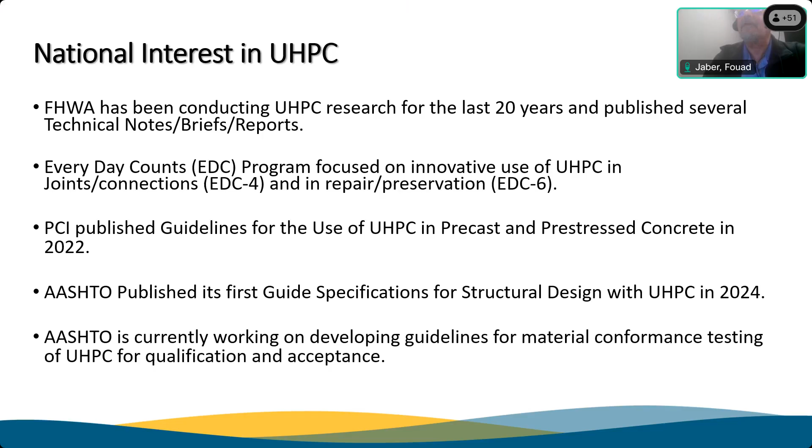So our vision, go ahead Lieska. So what we've done is we divided our vision, working with the University of Nebraska Partnership and FHWA, into two parts: seeing how we can use this innovative material in precast applications, which everybody knows we do in the yard with precasters.

So we developed our own Nebraska mix, using Nebraska aggregate material. Our vision is, we've now done the beams, we have a section with the decked I-beam using Nebraska mix, we're already doing that. We're working on the piles, we may have standardized using UHPC, and eventually we'll go to deck panels. That's really work in progress.

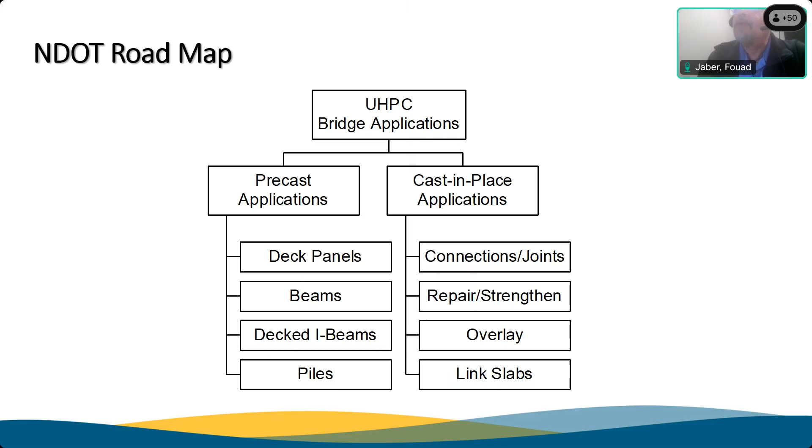The other side is establishing our own mix to use in the field with contractor mixing. This is for joint connections of bridges, repairs, and now underway we're going with overlays using overlay UHPC, and also the link slab, which can replace our deck expansion joints so they don't leak anymore over our girders. This material is very durable - chloride doesn't penetrate it. We think it's excellent material to restore our infrastructure in Nebraska.

We did participate in precast deck girder connection - we have that already, and now a decked I-beam already in the mix. We already let the project, to be constructed soon this year I believe. We sponsored research on how to do production of cast-in-place UHPC in bridge applications, and this is what we need to train our contractors on. This is work in progress.

We're working with our contractors, our district engineer, and our engineers to get this material in the field. Also, we have a repair strengthening material in place now. We're going to try to use it to repair ends of girders or any structural element that's deteriorated fast, and this is going to be good for the future.

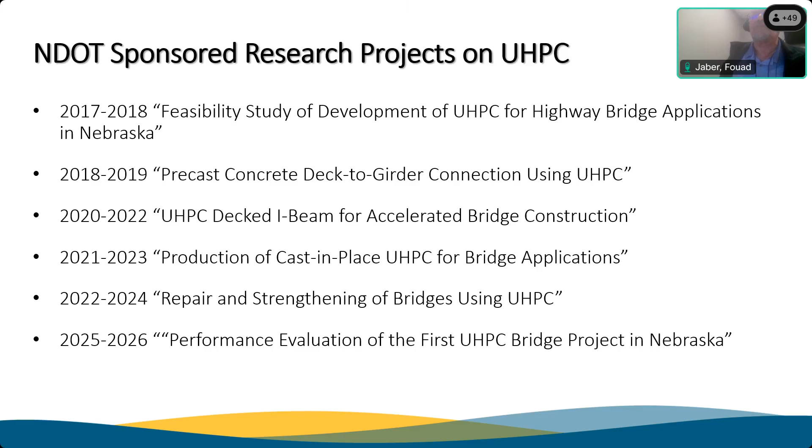And obviously we have the performance research sponsored now. After we get all this in place, we need to do the performance work - how we're going to collect data in the future to improve and improve and improve. So that's the research we've done so far, and more to come, I hope. Implementation-wise, implementation is very hard - it's always good to have research, but when we come to implementation, that's really the elephant in the room.

But regardless, we try to get our hands full. We did UHPC in the connection in the Primrose project in 2014, and that was successful. We partnered with FHWA on that, EDC count, everyday count. We did the transverse joint under an ABC project, finishing the project in 30 days using UHPC, built in Laurel in 2018.

So far, we have in the book with the precaster, actually from South Dakota, Gage Brothers, using UHPC decked I-beam. This is hopefully going to be our standard section, if successful, or we can improve on it later to see how it goes. But anyway, this project is running right now - we're going to build it this year. We'll see how it goes.

And obviously, we now have a repair project underway to use UHPC in deteriorated pier columns and girders. This project is already in the books - we're working on it to see how it's going to perform, and we're going to teach the contractor in the field how to mix it and perform all this mixing procedure, with the help of University of Nebraska.

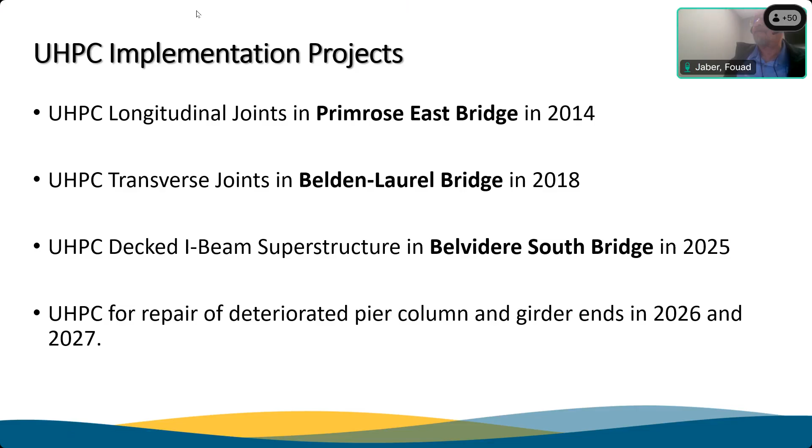So in general, I've given you a little taste of what we've been doing. We are excited about this innovative material coming to Nebraska. I think we are going slowly but surely, and I think this material is going to be here for hundreds of years. Thank you very much for your attention.

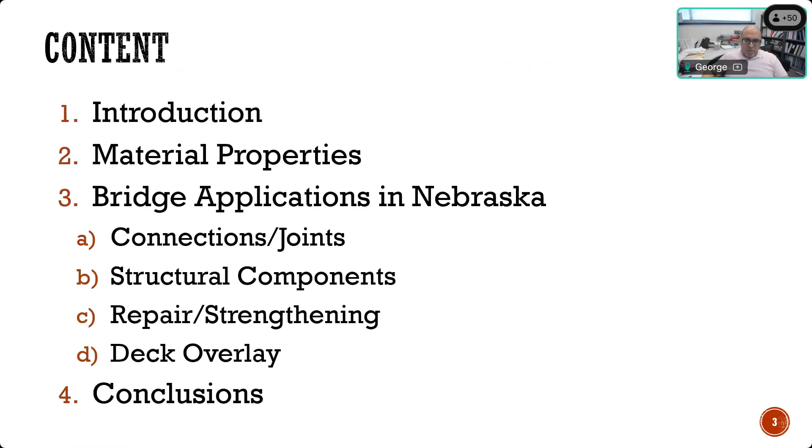I will first introduce what UHPC is, how it's defined, how it's different from conventional concrete, and then go more in depth into the properties of this material, because the difference in properties will also make the design and construction done differently. Then I'll go over the applications, including those Fuad mentioned, and show the research work done at the University of Nebraska, sponsored by the DOT, to make sure we are using it the right way and getting exactly what we are looking for. I'll group them into connection joints, structural components, repair and strengthening, and overlay, and conclude with a summary of what was done.

If we look at the definitions of UHPC, the Federal Highway Administration defined it as you can see on the screen. It is a cementitious material with the same ingredients as conventional concrete, but the gradation of the particles is different, optimized to minimize the pore structure. By doing that, you get a material with very low permeability, or very high resistance to penetration of liquids or contaminants. That's what gives it that durability aspect, which is the most important one.

In addition, it has a high percentage of discontinuous internal fiber reinforcement. As you can see in this picture, a specimen is being pulled in tension, and you can see these fibers sticking out of the concrete, bridging the gap between the two parts until failure. In the cross section, all these little dots are the fibers. This high percentage of fibers provides tensile capacity of the concrete even after cracking, so the concrete doesn't just lose capacity once it cracks but can sustain it. That's why it's called sustained post-cracking tensile strength, at a minimum of 750 psi, though most of the time we get higher, 1,000, 1,200, or even sometimes 1,500.

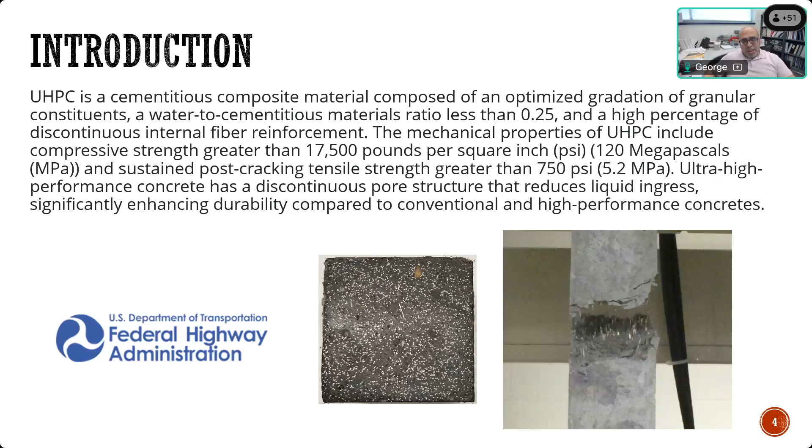This is the definition by the FHWA, but before that, there was the first ASTM standard done in 2017, ASTM C1856. Up until now, that's the only ASTM standard for UHPC describing how to fabricate a specimen and test it to make sure the properties are met. They also add to the definition that the nominal maximum aggregate size is less than 5 millimeters or a quarter inch, so UHPC doesn't have any coarse aggregate, only sand and powder material.

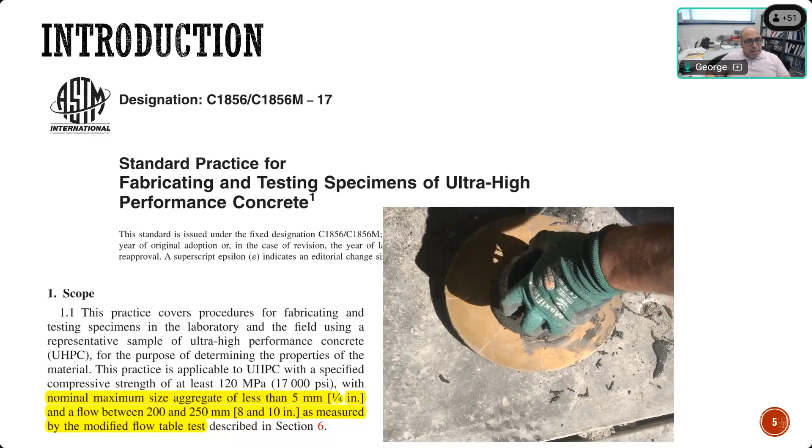It also adds a statement not in the FHWA definition, which is having a flow of 8 to 10 inches measured using the flow table test shown on the screen. So it's a very flowable material, like self-consolidated concrete, and you don't need to vibrate it. This gives the material the ability to flow and fill very tight spaces between reinforcement or strand, or allow for very small cover, because it's highly durable and at the same time very flowable.

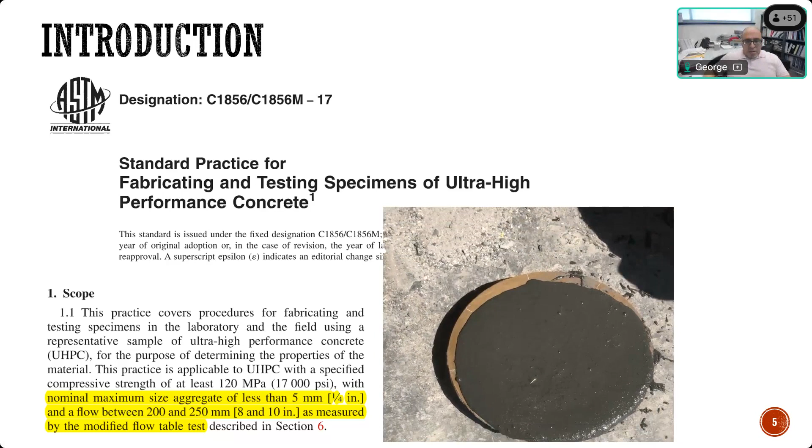As mentioned earlier, the PCI completed a 3-year research project from 2019 to 2022, publishing a long report showing different types of applications for UHPC, not only in bridges but in bridges and buildings. They also published a report giving guidelines for precasters on how to produce UHPC and how to do quality control. More recently, a year ago, FHWA and AASHTO published the first document on guide specifications for structural design using UHPC. It doesn't cover everything like regular AASHTO LRFD, but it covers enough for the DOT to start making components using UHPC.

As you can see from the picture, even on this cover, you see how thin the web is. This web is with UHPC, you don't need to add reinforcement. You don't even need to add reinforcement in the bottom flange or top flange because of the fibers within this material that give it some kind of reinforcement. So it can basically reduce significantly the amount of conventional reinforcement in concrete.

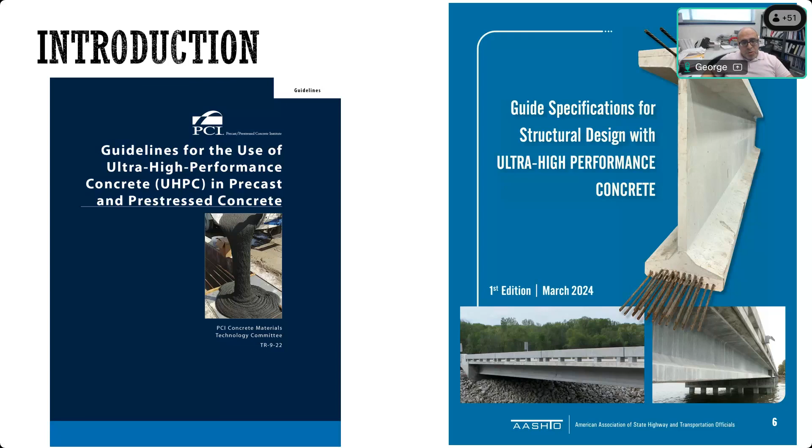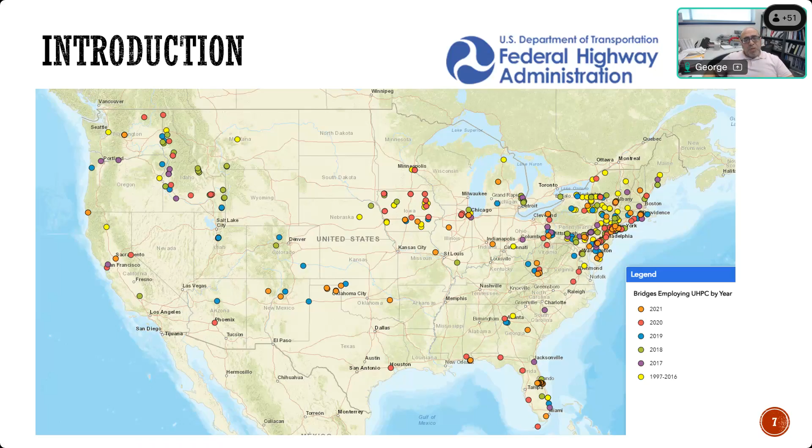Just to give you an idea about how widespread the use of UHPC is, this is a map from the FHWA website that shows the different projects and their distribution across North America. It shows how the projects increased recently, specifically in the last 3-4 years, with a large number of projects in the East Coast, especially in New York and New Jersey, and some in the Midwest in Iowa and also Nebraska.

If we look at how these projects are distributed with respect to the type of project, you'll still find that the number one application of UHPC, representing 77%, is the connection between the joints of precast pieces. So that's the most common application. And then after that is the use of link slabs to replace deteriorated expansion joints.

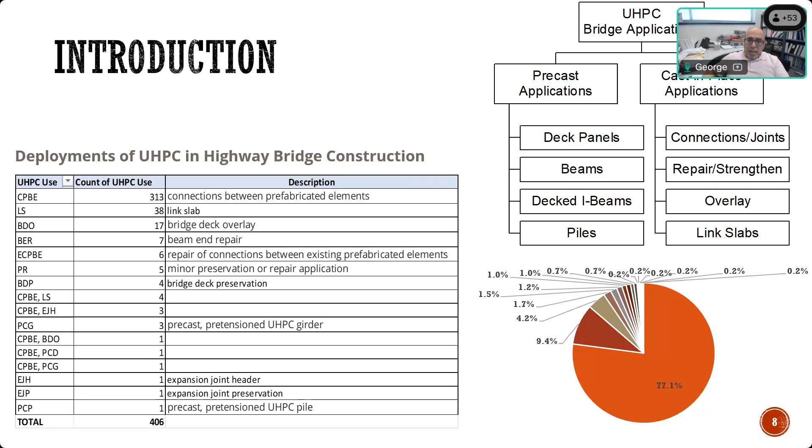So to present a little bit more information about what are the constituents or ingredients of UHPC, this is a mix that was developed 6 years ago using local material in Nebraska, and that's the composition, and that's kind of a schematic presentation showing the particle sizes.

The largest particle size is actually the fine aggregate. So you have a fine aggregate, number 10 sand, that's the majority of the mix. After that comes the cementitious material, which is cement, and it has slag and silica fume as supplementary cementitious materials. In addition to that, you have water and admixtures, and the amount of water is very small compared to the amount of cementitious material. The ratio is less than 0.2, which is a very low water cement ratio.

However, with the use of high range water reducers and workability retaining admixtures, this allows the material to be very flowable and maintain its flow for a significant amount of time. And of course, the most important component for the tensile behavior of UHPC is the fibers. I show a picture here to give you a sense of how big these fibers are: 1/2 inch long and a very, very small diameter, 0.02 inches.

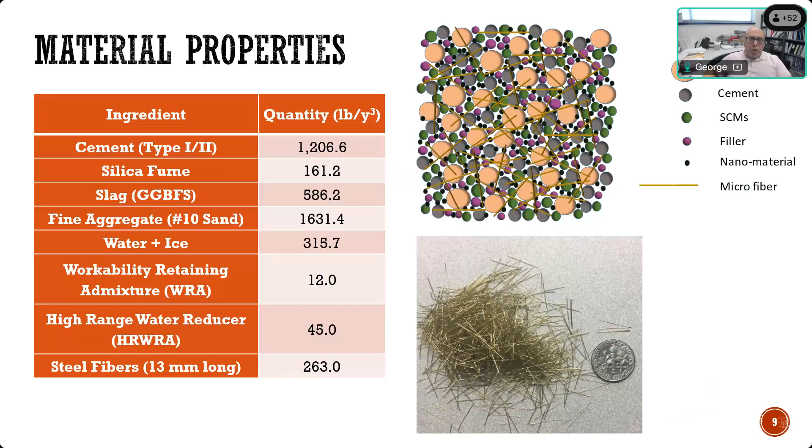Here's just showing you some of the properties that you get from this mix. This is results from a mix that was done actually not in the lab as a small batch, but at one of the precast producers in Nebraska. When we did one of the specimens, they made a large quantity, about 6 cubic yards of UHPC, and we did the testing for them back in '22.

You can see the compressive strength grow significantly, and even after 51 days, it's still going up, and we reach over 21,000 psi compressive strength, much higher than what you usually get from conventional concrete.

It is actually showing you the failure of the specimen even under that high load. It does not have the same conventional failure that you get when you test a cylinder. You don't form a cone or big cracks, or get it completely fragmented, but you basically just get cracks with the fibers holding it together. You can see also the fiber distribution across the section. That's what gives it the ductility that you need and prevents it from having a sudden failure.

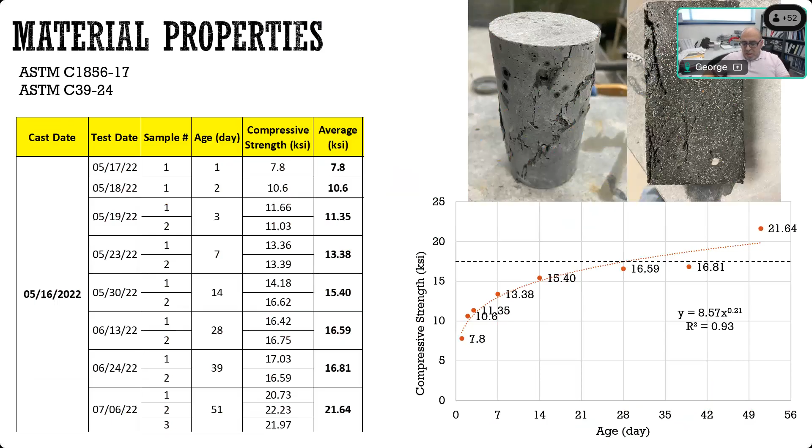Another test that is very important for UHPC is the flexural test, which is pretty much a 4-point bending or third point loading test, where you have a prism made of UHPC loaded at 2 points in the middle. This is a 12-inch span, 14-inch prism, with either a 3x3 or 4x4 cross section. There are two types of prisms, and you test it not just looking for the maximum load that breaks it, but for the entire load deflection curve.

Here are the flexural stresses and the deflection. You can see what exactly happens: after it cracks at this point, it's still carrying load until it reaches a peak, and even after the peak it still has some residual capacity. So it does not break, and that's the function of the fibers that are bridging the gap once a crack occurs.

You evaluate this material with respect to the cracking stress, which is the first line here. According to PCI, this requires to be more than 1500 psi, and the peak should be higher than 2000 psi. Also looking at the residual stress at L over 150 of the span, which is 0.08 inches, it requires this to be at least 75% of the peak. As you can see, all the specimens we tested for the mix developed in Nebraska meet these requirements quite well.

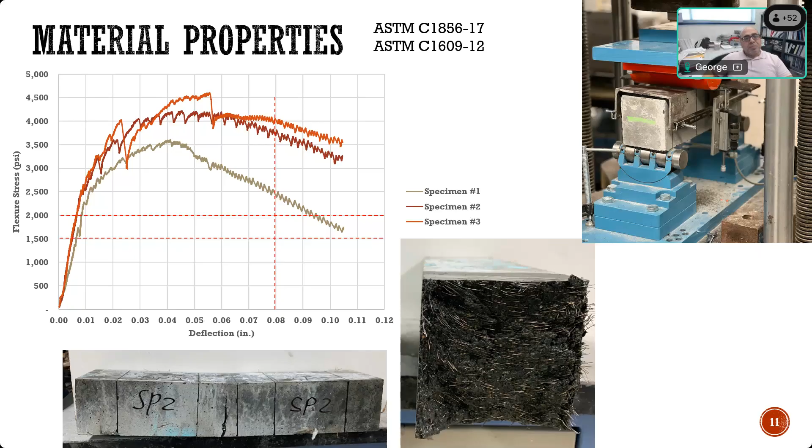So you're developing a stress-strain diagram the same as you would with a strand or steel bar, except here it's fiber reinforced concrete. You look at when it first cracks and then how capacity increases even after the first cracking - that's called strain hardening. For regular concrete, once it cracks, it drops immediately. But for UHPC, because it's fiber reinforced, once it cracks it still gains some capacity and carries more stress before it starts going down. That's what's called strain hardening.

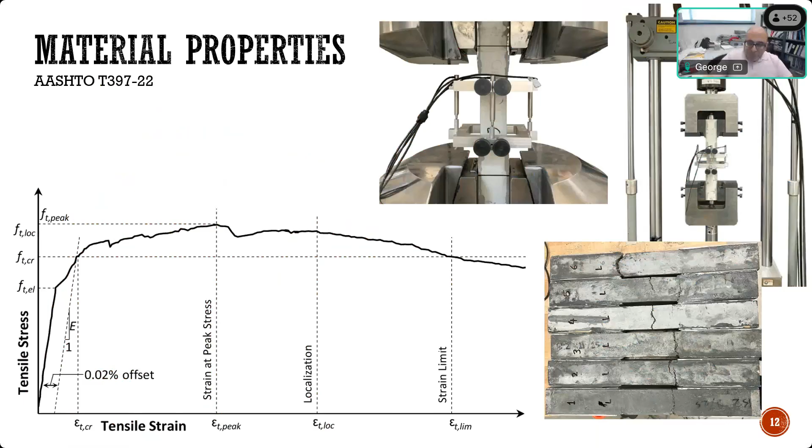After that, there's also something very important, in my opinion, for UHPC - it's not just a mix and adding the fibers. You want to make sure the fibers are stable in the concrete, very similar to the idea of self-consolidating concrete, where you want to make sure the coarse aggregate is well distributed and stable in the mix.

There's still no standard test to do that, but so far we evaluate it visually using what's called the visual stability index, by looking at the shape of the material once you do the flow test, and seeing if the fibers are well distributed, or if there's any separation or agglomeration in the fibers.

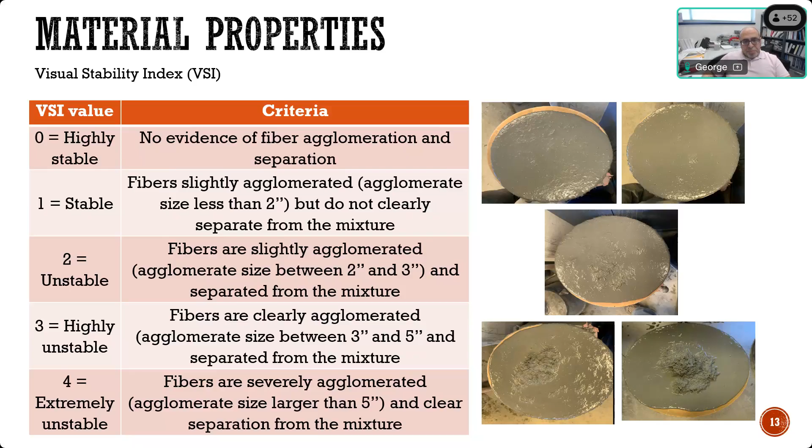Here's also showing you that in a different way. Sometimes we look not just at the spread, but also how fast it spread, or the rate of that spread. I'm going to run a video, but I want to make sure the sound is low.

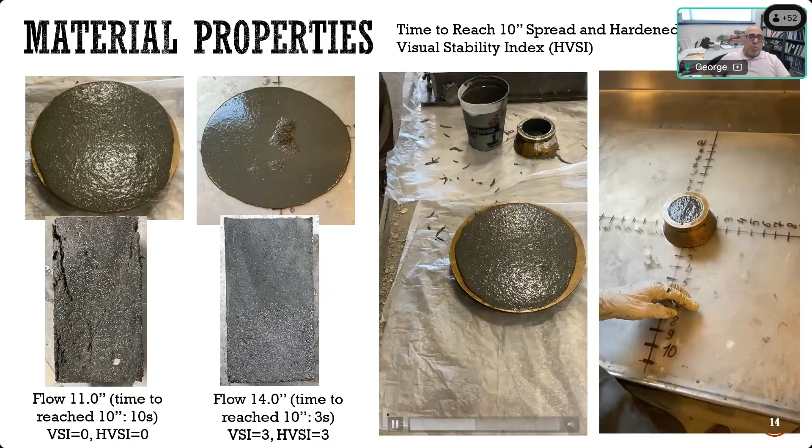So here's a very stable one. You can see it takes time to spread and fill the flow table, which is 10 inches in diameter. That's an example of a very stable UHPC.

But the other one here, which is not as stable, you can see what happens. It just flows very fast, which means it doesn't have enough viscosity, and you get some separation of the fibers. This is very important during construction. At the plant or the site, you do this test before you cast it into the form, to make sure it's flowable enough and stable enough.

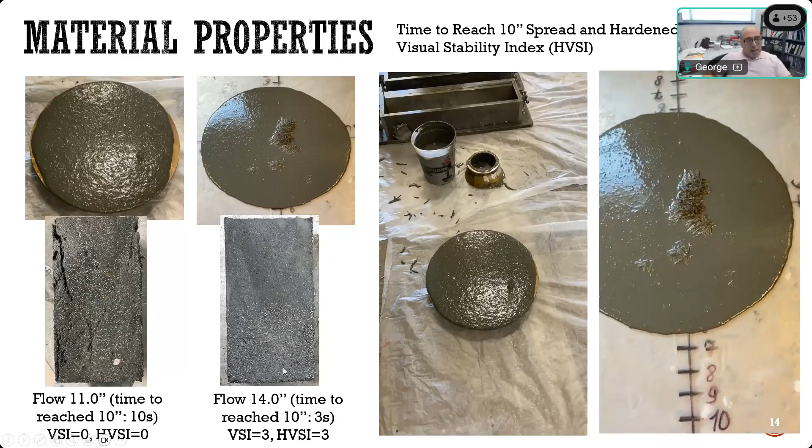You can also detect that later if you make cylinders and slice them. You can see this is a stable mix on the left side, where all the fibers are distributed equally from top to bottom. But the one next to it on the right has a big part at the top with no fibers, and all the fibers are pretty much at the bottom. This is not acceptable.

One other thing that is important for UHPC to know is that it has a lot of cementitious material in it, which makes it shrink a lot. So you need to understand this is, of course, a risky thing, but at the same time there's a solution for that.

Some UHPC, when they're designed, have shrinkage reducing admixture or shrinkage compensating admixture added to them specifically, and this lowers the amount of shrinkage to the normal levels you get in any regular concrete.

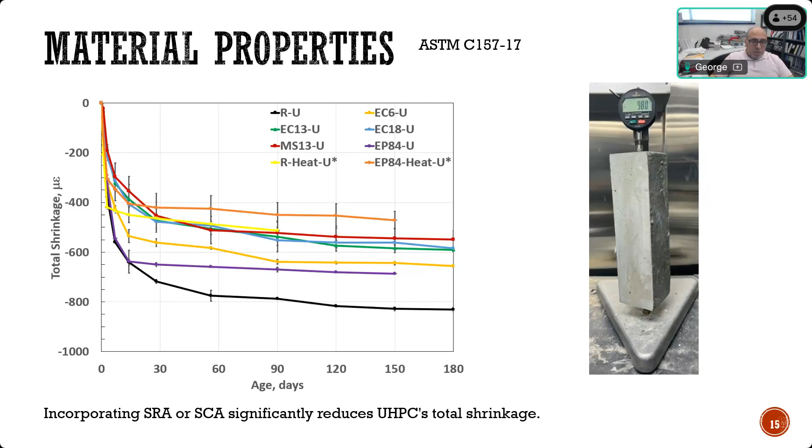We did that evaluation on the mix developed here in Nebraska, to make sure we understand how it behaves in terms of shrinkage. So that's the first part, mainly focused on material, giving you a brief overview on how it's different from conventional concrete with respect to flexure, compressive strength, tension, shrinkage, and fiber stability.

Now let's go over some of the applications. I'll start with two projects done back in 2014 and 2018, when a commercial UHPC was used, before we developed our own UHPC. That's the Primrose East Bridge, where they used UHPC for the connection between precast segments.

In this project, it had folded plate steel girders with a conventional concrete deck cast on top, along with diaphragms. We made these girders 57 feet long, and there were about 4 of them, placed side by side, and then used UHPC to fill the longitudinal joint between the segments.

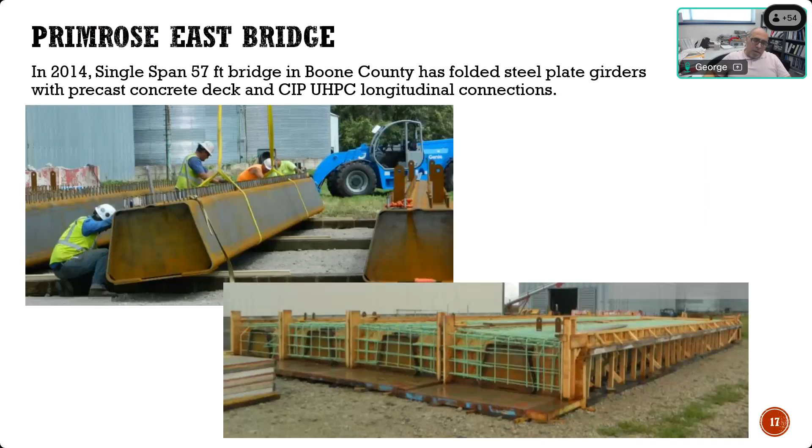This picture shows how the segments look. UHPC was mixed on site using portable mixers, then cast at these joints and covered to make sure it doesn't flow, since the bridge might have some slope. This shows it leveled out and filled the whole joint.

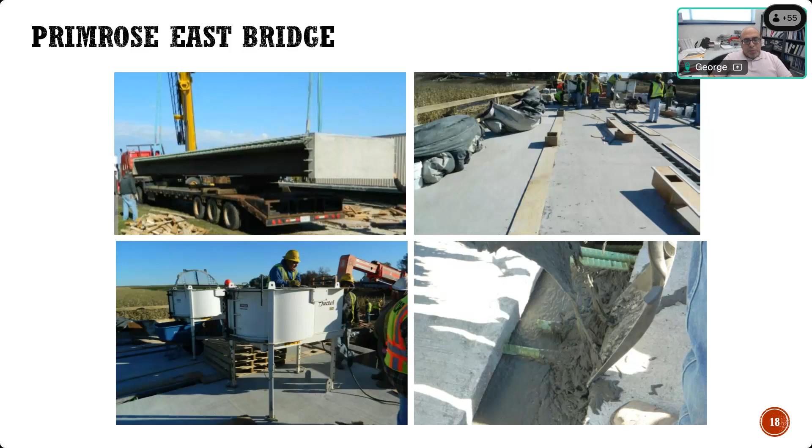One thing to notice is the joint itself is very small, so you don't need a 2 foot or 1.5 foot joint between pieces. I think this was 8 inches, with bars from each segment projecting about 5 or 6 inches, because UHPC allows bars to be developed in a very short distance, about 8 times the diameter of the bar. So a number 5 bar can be fully developed in 5 inches, and a number 6 in 6 inches. It's very efficient in reducing the size of the joint, the quantity of concrete, and how much the bars need to project out of the precast piece.

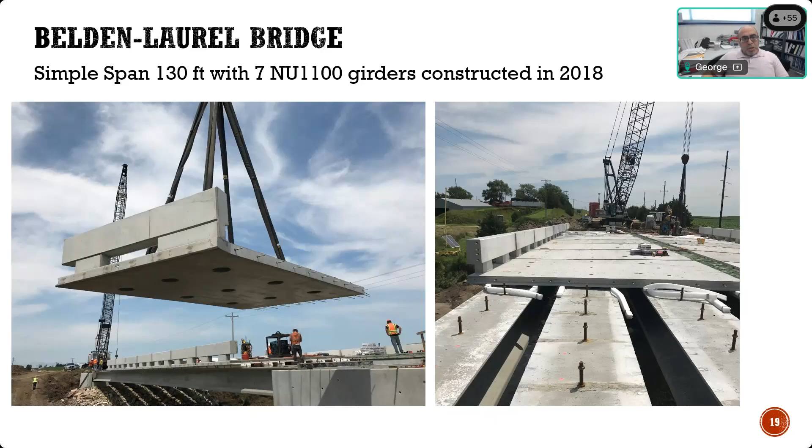The second project was done in 2018, building the Belden-Laurel Bridge. It's a simple span, 130 feet long, with 7 NU 1100 girders, and also a precast deck with a rail. The whole bridge was precast, and we used UHPC in the transverse joints between the deck panels as well as the joints between the rail sections.

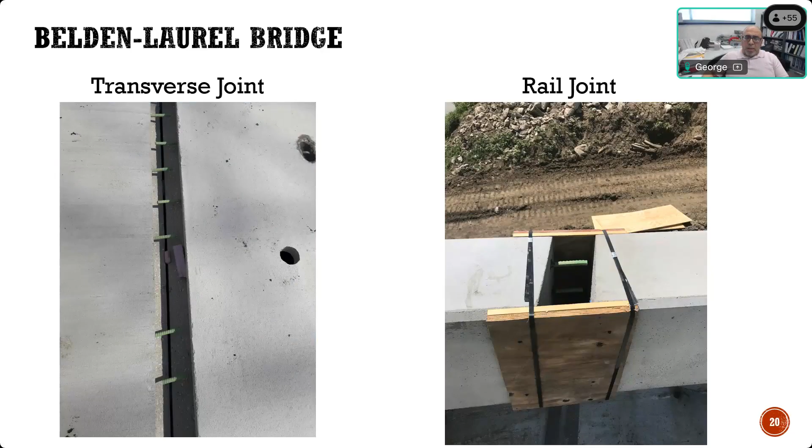Again, the joint was very small in width, and the bars sticking out were very short as well, 5 or 6 inches. I have a video here too, without sound, showing how UHPC was mixed using on-site portable mixers, then transported by wheelbarrow to cast into the joint.

They put plywood on the side of the joint, so they can also cover it from the top to have a top form to make sure it does not flow outside the joint, because the bridge has a slope, a cross slope of about 2%. So you have to form it from the top as well.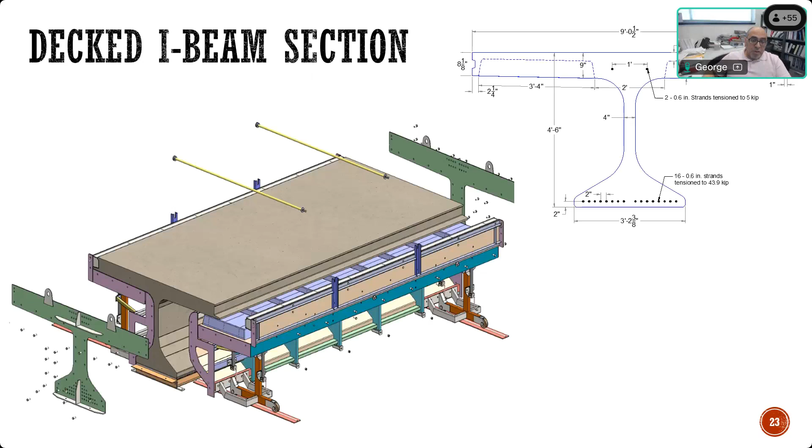Also, you reduce the thickness of the web, as well as the thickness of the bottom flange. So you end up with a section that uses less material, has less weight, so it can allow for more live load for the same weight, for the same spans and same spacing.

Here's the picture and a drawing of the specimens we did in Nebraska before we went into this project. We did a couple of specimens to check the performance and the production of this kind of section. That's a specimen that is 20 foot long, 10 foot wide, with a form here.

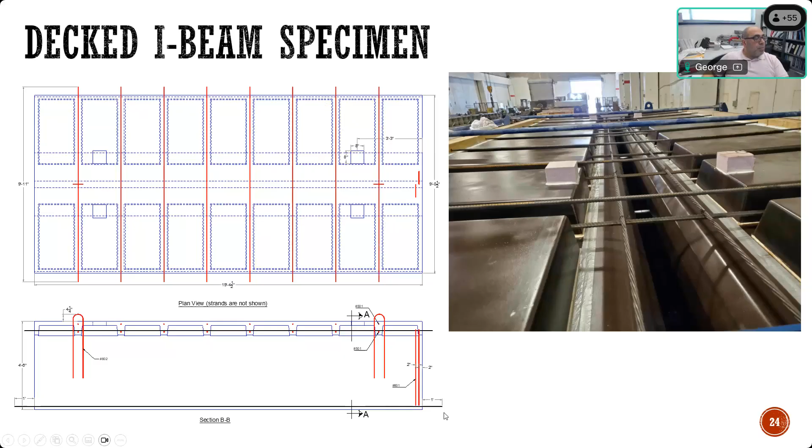You can see the pans used to create the voids, and you have the ribs between the voids, and the ribs are the only part that has reinforcement. All the rest has no reinforcement except the pre-tensioning strands.

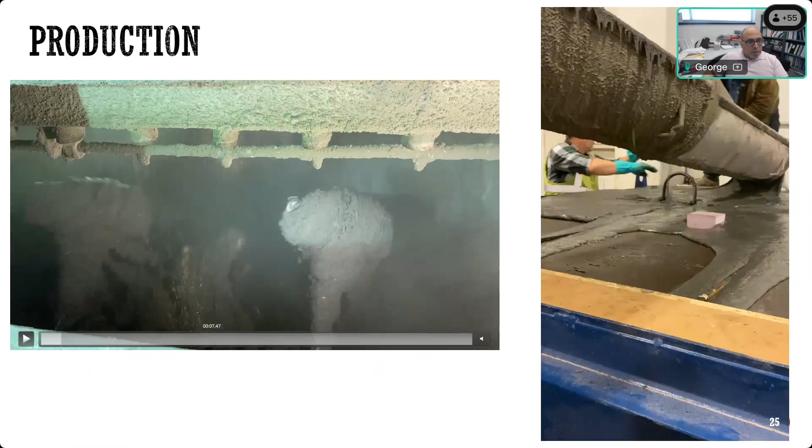So that was done. Let me just show you some pictures. This is the mixing in the precast plant, and you can see the fibers were added after the mix became flowable. That's how you do it.

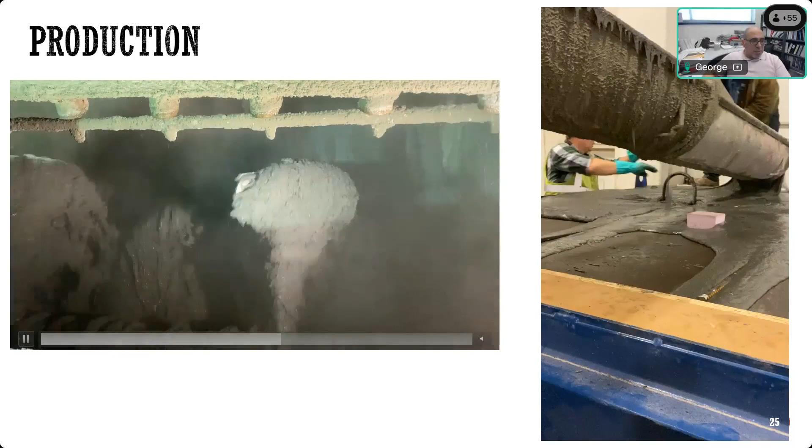You mix it until it becomes flowable, and then you add the fibers into the concrete, so you get them well distributed, and it flows well.

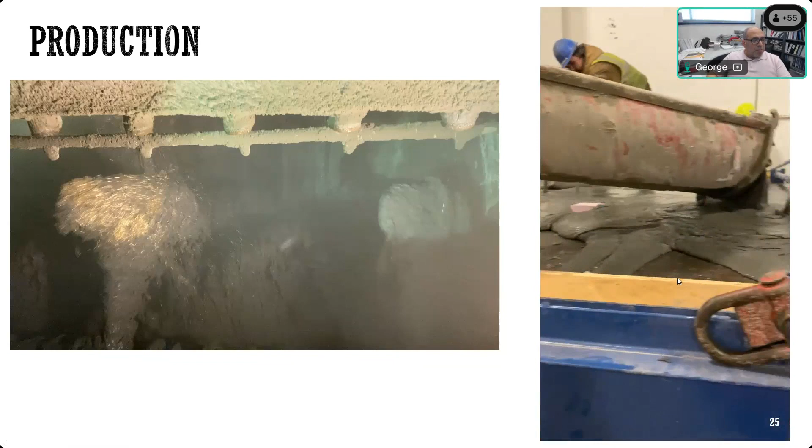Here's another one that shows you when they were casting it, showing how flowable it is, and it can fill the bottom flange, the web, and then at the top it filled the ribs between the pans. So it's a very stable and very workable mix.

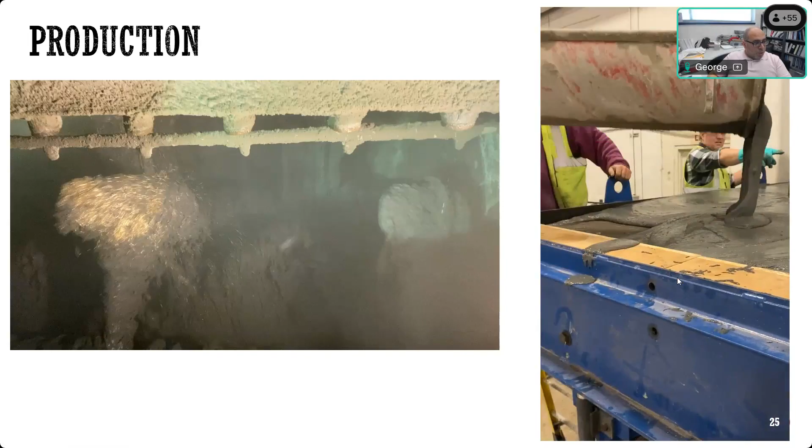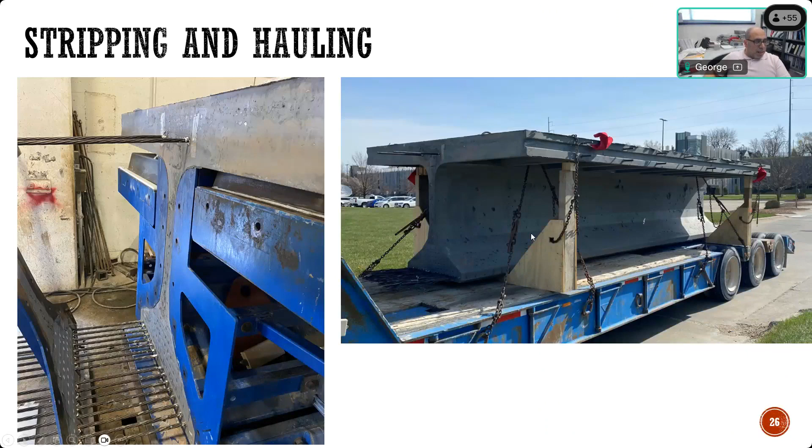So this is a segment that was produced: the pre-tensioning strand at the bottom, dropping the top flange form, dropping the pans, and then shipping it to the lab for testing. That's how it looked. We did a few tests, and these are all in a report of the project, but I'll just show you one test.

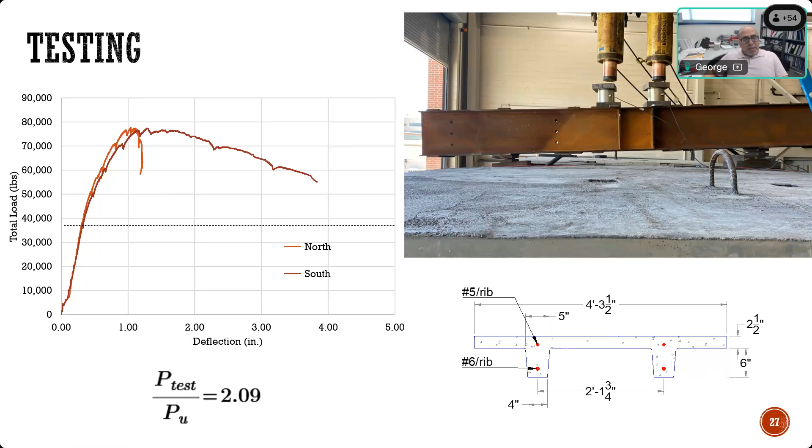Here's a cross section of the deck itself with a ribbed slab, and there's reinforcement top and bottom. We were able to load it with over almost 76,000 pounds before we had a failure, and that gave a ratio between the load and the ultimate load, the factored ultimate load from the truck, of more than 2. So it can carry twice the capacity you design for, even for the factored load.

And it shows here the failure, how it happens, pretty much like punching shear at the edge of the slab here where we put the load.

So the UHPC worked very well in terms of, without even reinforcement in the skin, having the fibers give it very high resistance to punching shear, and it performed way more than needed.

We did also, as a part of the project, experiment with production at another precast producer for bridge girders. So we did another specimen, exploring if we can do a bridge girder using segments that are post-tensioned. It's a different system to allow the contractor to have options, either pre-tensioned or segments that are post-tensioned.

And in this specimen, we also experimented with the use of a solid slab that is thinner than regular. In a regular deck slab, we do 8 inches. This one we did 6 inches solid, and we also did testing for it.

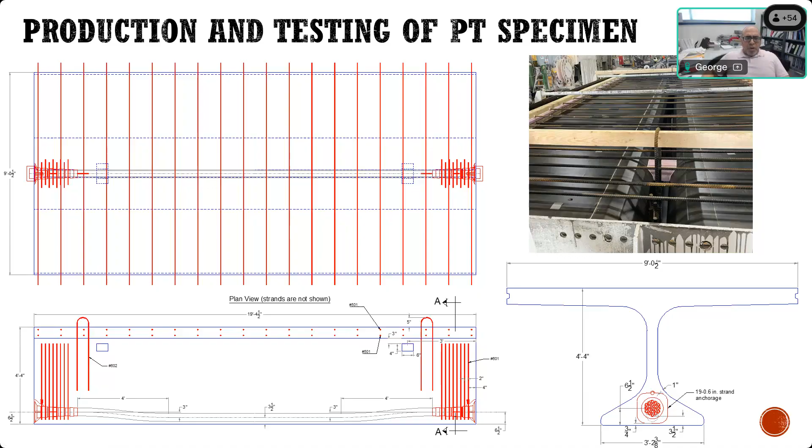So as you can see, the production went very well, very flowable, and it resulted in the cross section you can see in the bottom right corner of the slide. That's when it's ready for shipping to the lab. You can see the thin web and the location for the duct for the post-tensioning, and the solid slab that is only 6 inches.

We did similar testing for that as well, and it performed even better than the previous one. Performed very well, getting a punching load capacity to demand ratio - the ultimate one is more than 3.2, and it did very little cracking on the side and bottom of the flange. So these were very successful specimens in terms of production.

The producers were able to produce larger quantities, over 6 cubic yards of UHPC, in a very efficient way using the Nebraska mix, and also gain experience on how to deal with such a material and the forms for the decked I-beam.

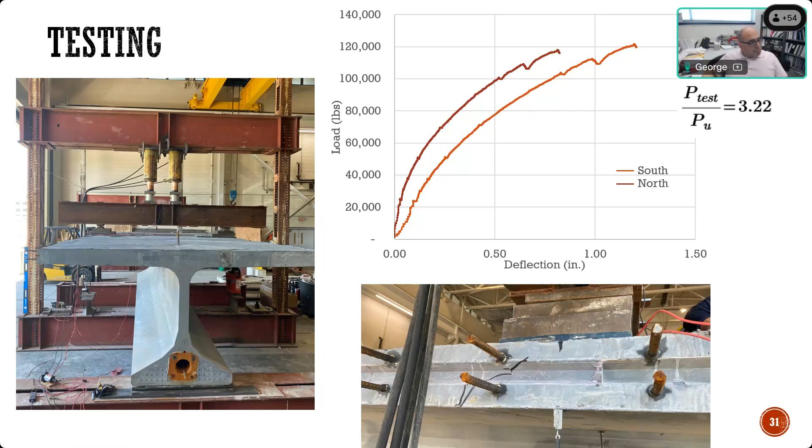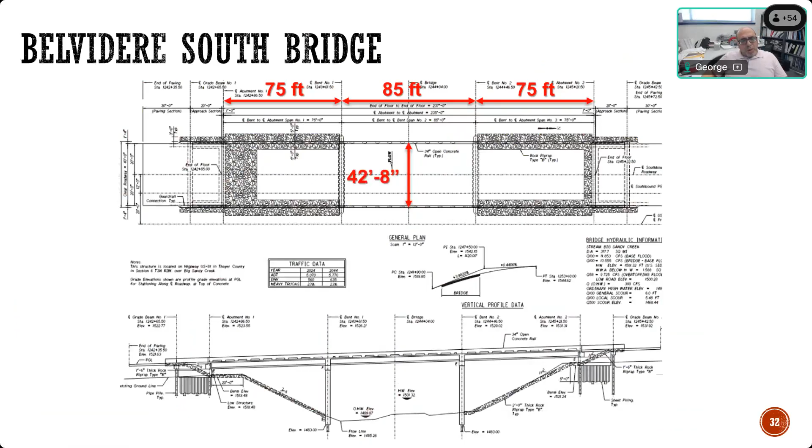This is some information about the bridge project that is being planned to be produced and constructed this year. It's a 3-span, 75-85-75, and it will have 4 girder lines in each span, for a total of 12 girder lines. This is a cross section, and here is a cross section of the beam, the decked I-beam with ribbed slab, and it will be produced using the same mix we just presented.

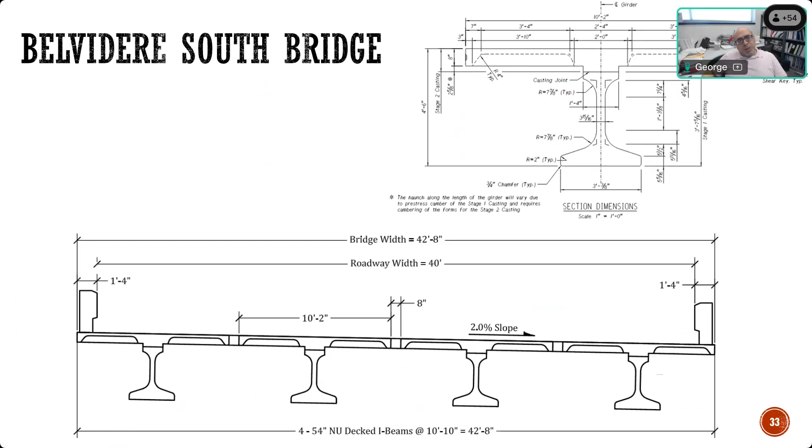Okay, let's look at some other applications for UHPC. Just want to make sure I don't take all the time in the presentation and give you some chance for discussion and questions, so I'll go briefly over those.

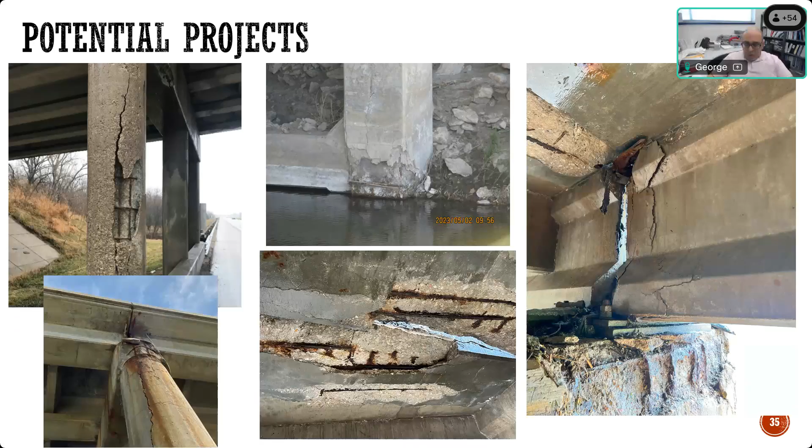So these are all actual projects that have big potential to be successful implementations for UHPC in repair. Within the research project, we looked at different ways of using UHPC to repair, and one of them is trying to strengthen in shear by adding 1.5 inches or 2 inches of UHPC around the web of an I shape. This is, of course, a scaled specimen.

This is not a full scale, but it was just to evaluate how much capacity we can get when we cast UHPC around the web. So we added some mechanical anchors, formed it for the 1.5 or 2 inches of UHPC, made holes in the top flange so we can cast from that, and we end up with a cross section of the strengthened girder that looks like the bottom picture here.

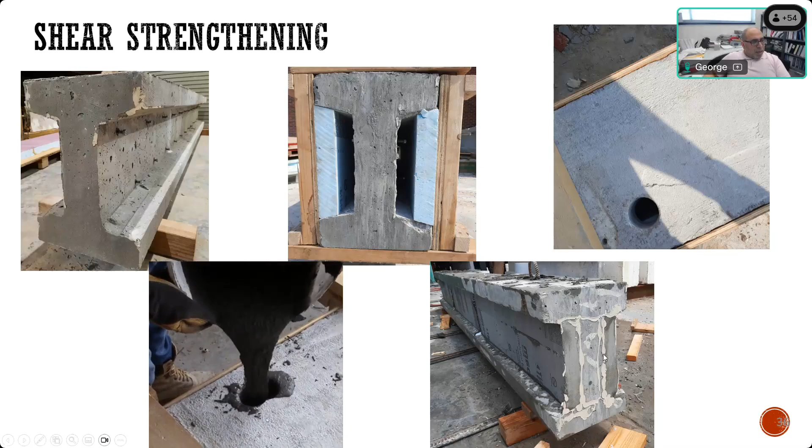And then we tested those. So we tested those girders in shear, and we actually tested 5 girders.

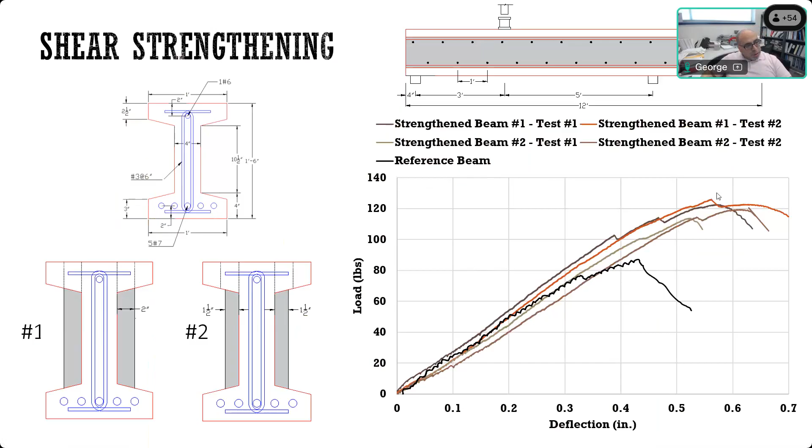The first one, the black line, is the one before strengthening, and then we had 2 strengthened using 1.5 inch additional web, and the other 2 with 2 inches. You can see a significant increase in shear capacity by adding only 1.5 inches or 2 inches of UHPC around the web. And we didn't notice any kind of delamination or separation between the two materials.

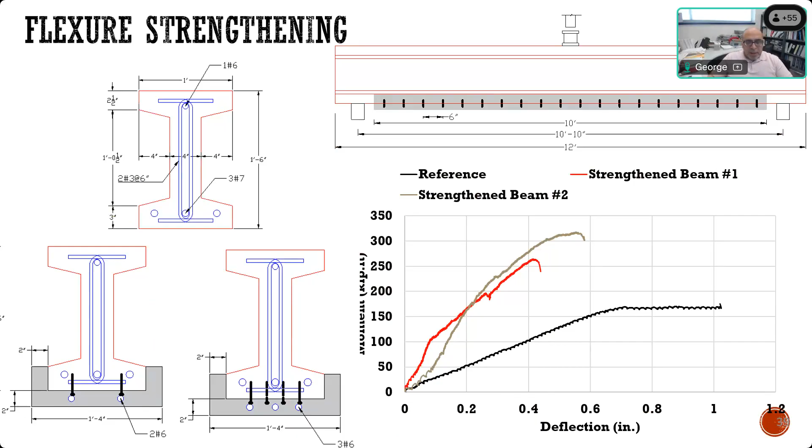We looked at this and tested it in flexure. The black line is the original reference, the red line is when we added 2 number 6 bars, and the brown line is when we added 3 number 6 bars. The UHPC acts as a composite section with the conventional concrete, and the new bars contribute to the flexure capacity.

That was a very successful investigation. We also looked at how you can encase existing columns using UHPC.

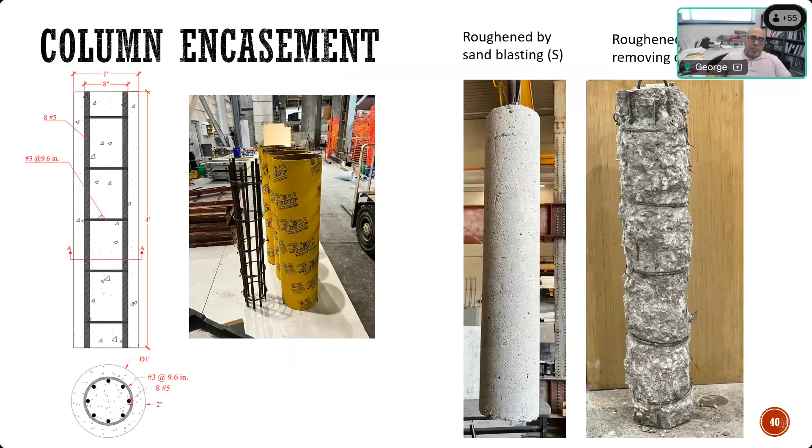So we built a few specimens. Some used sandblasting, others had the cover removed, then we formed around those and added 2 inches of UHPC all around the column.

This is how we formed around the column when adding the UHPC. That's how it looks in the picture after adding 2 inches all around. Some specimens were done with sandblasting surface preparation, others with removing the cover.

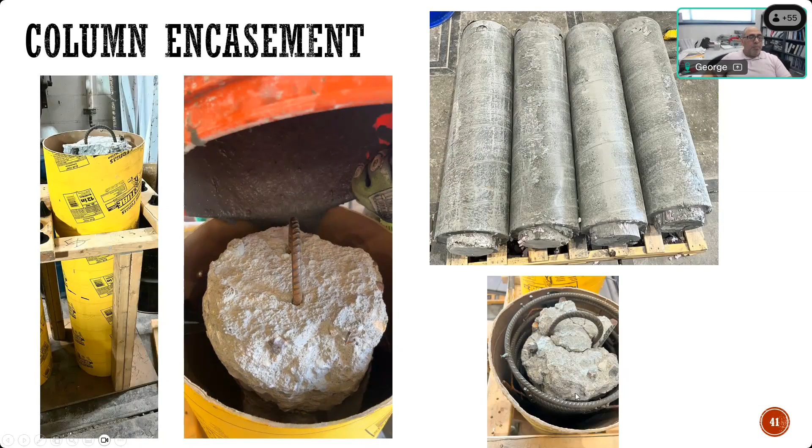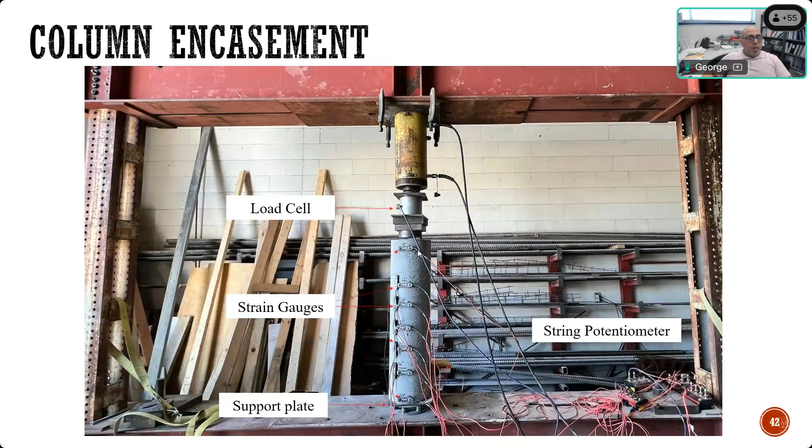In some cases we added additional confinement reinforcement, to see how this performs when we apply axial load and how much increase in capacity we get. Here's a summary of the results we looked at.

We looked at 2 specimens with sandblasting surface preparation, others with the cover removed, and 2 of them also had additional tie reinforcement added at the top. The axial capacity is supposed to be 293 for the original one.

After adding this UHPC, we ended up increasing the capacity significantly. For the last 2 columns we actually stopped the test because we maxed out the capacity of the loading frame, so it could have gone even further after adding the reinforcement at the top.

We decided to use reinforcement at the top because in the first specimens we found cracking there, so we added additional reinforcement that helped significantly increase the capacity. We're exploring the best and most efficient way to use UHPC, even in conjunction with added reinforcement, if that helps improve performance.

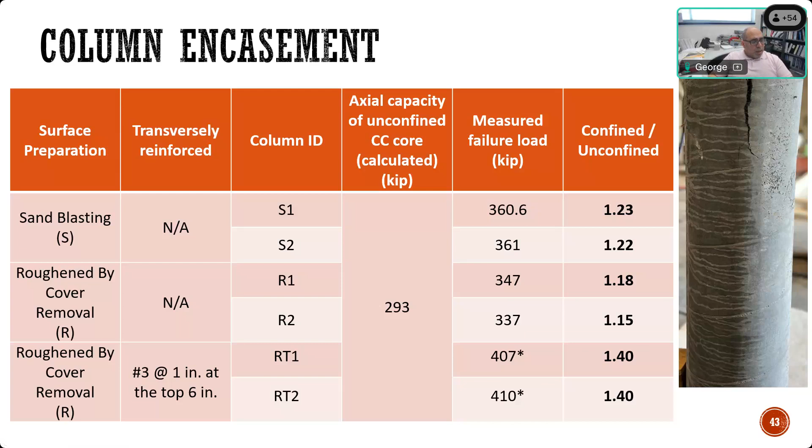One of the last applications is deck overlay. I'd like to mention that when you use UHPC in deck overlay, you need a different type of UHPC than the one used for structural components or repair.

The reason is that when you add a thin layer of UHPC on top of a deck with slope, you don't want it to move and change thickness from one place to another. You want it to be stable, and you cannot top-form it.

So you need a special kind of UHPC called highly thixotropic, which means if you don't agitate it, it stays stiff, but if you agitate or vibrate it, it continues to flow.

That required changing the mix or developing a new one with high thixotropy and also workability retention, in addition to having good bond with the existing concrete.

The picture on the left is the one we presented earlier. But for UHPC overlay we developed another mix that doesn't flow under static testing, but can spread and flow under dynamic testing — a different type of behavior needed for that application.

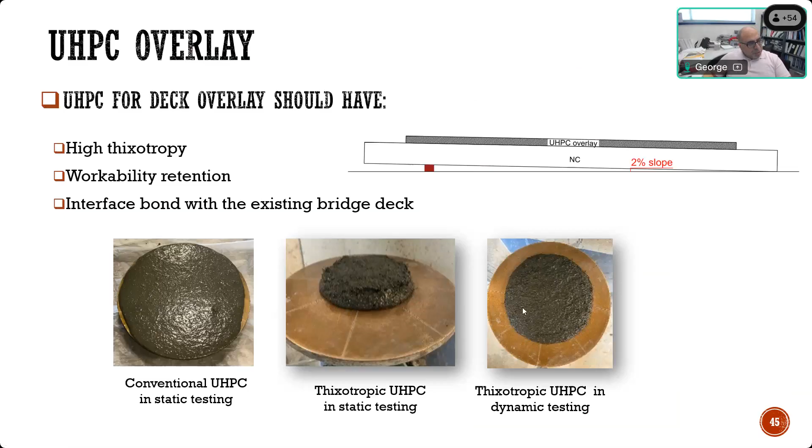We also looked at different ways of surface preparation. For a new bridge deck, we can use a surface retarder to expose the aggregate.

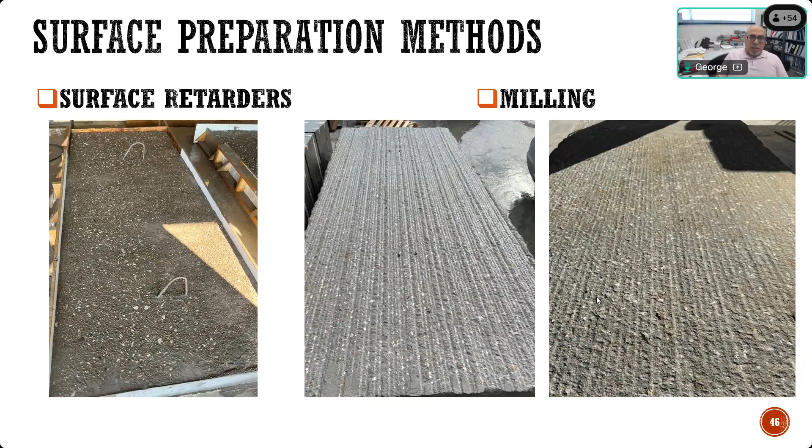If we're looking at an existing bridge deck, we can do milling, and we tried two different patterns, the typical one and a finer one, to see how much bond you can get with UHPC. We made the specimens, developed the mix first, and cast it at a 2% slope. Let me show you a video.

We used a vibratory screed to spread it. You can see how stiff it is ahead of the screed, but it flows very well and levels well with the vibratory screed.

That's really what we're looking for: a static spread of less than 6 inches, but a dynamic spread of about 7 or 8 inches.

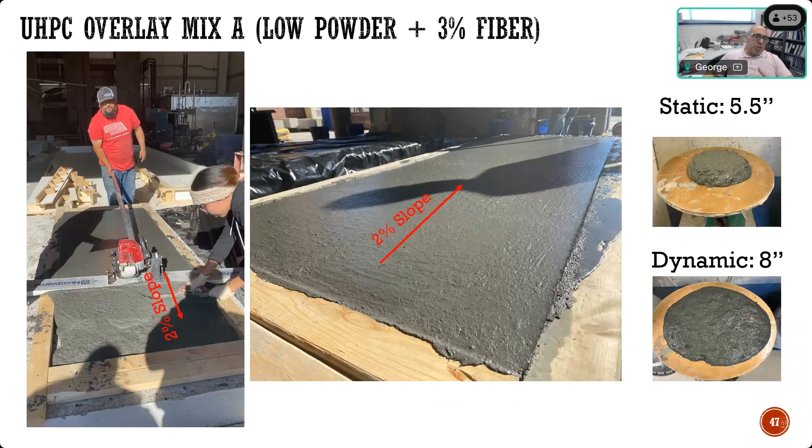We did that with a mix that has low powder and 3% fiber, and then again with a different mix using high powder and 2% fiber, to give the DOT two options and see the performance when we change the dosage of fibers and powder.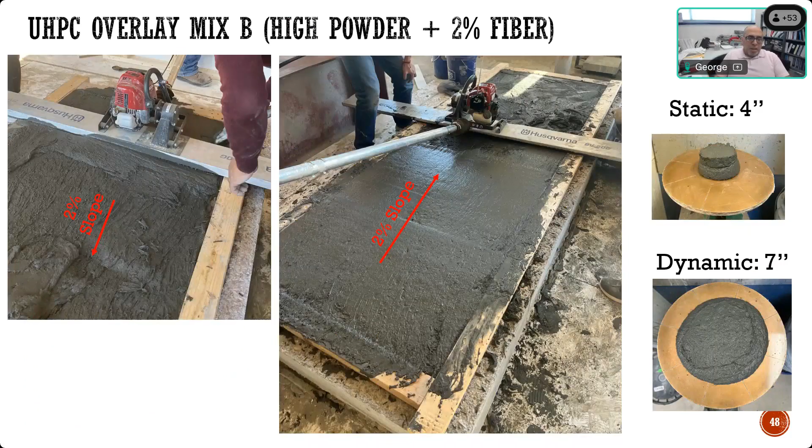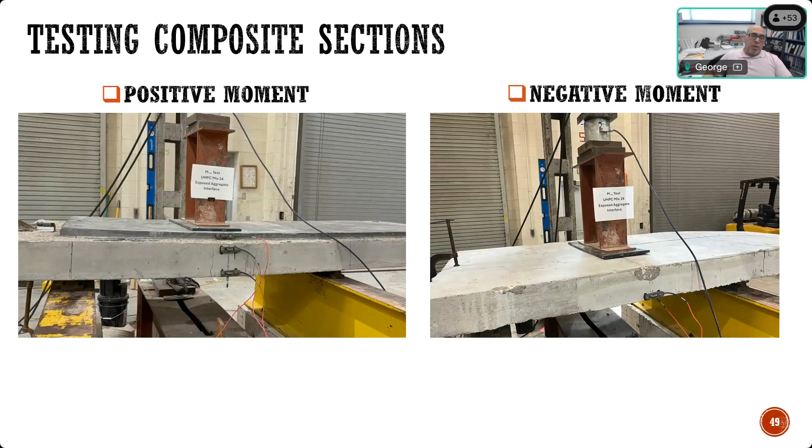So we did that experiment, and we also tested them cast on top of a conventional concrete deck, tested in flexure, then flipped the specimen to keep the UHPC at the bottom, so we see the negative moment zone in the bridge deck and how it performed. So we evaluate the capacity in positive moment and negative moment.

We did that for multiple specimens with different types of surface preparation, whether it's a surface retarder, fine milling, or typical milling. We looked at load deflection or capacity deflection diagrams, and in all of them we compared the experimental value and the calculated one and the ratio between the two. We always exceeded the predicted capacity, or even the capacity for a conventional normal concrete slab, significantly increasing capacity in both positive and negative moment.

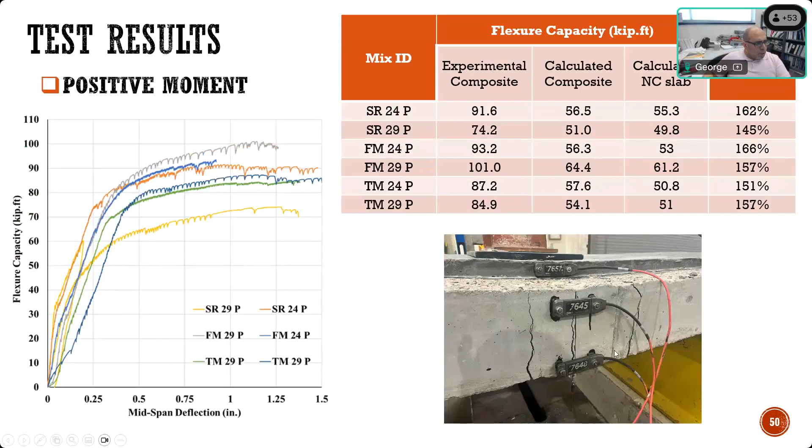Here's one example, just to show the failure. When you have a positive moment, you fail the conventional concrete by cracking it and yielding the bars. In the negative moment, because UHPC is in tension, you get crack localization, and you see the fibers bridging the gap until they completely pull out of the concrete.

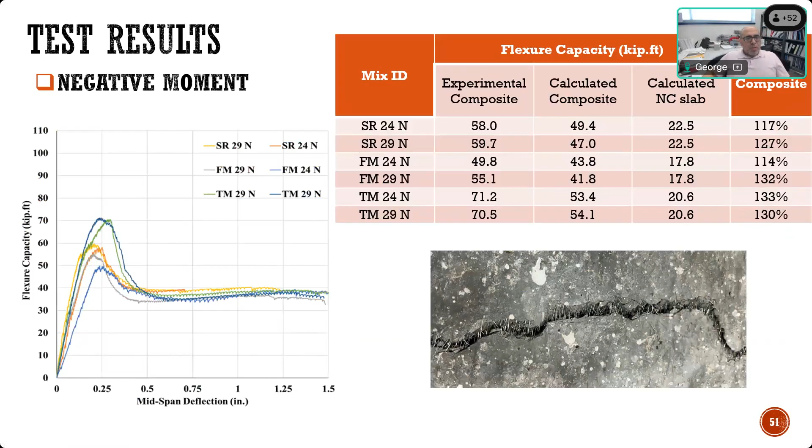So we expected that behavior, and we saw that in the testing, so we're very comfortable that it behaved as predicted. So I will summarize the presentation by giving a few conclusions here, so we can have some time for discussion and questions.

There are a lot of applications for UHPC in bridges all over North America, and that's pretty much because designers realized it has strength and durability and workability—properties that make it easy to cast—and also helps reduce the life cycle cost for bridge maintenance and repair.

We developed a non-proprietary mix using local aggregate and local material in Nebraska, ending up with a mix that's pretty much a quarter the cost of the commercial one.

When you produce UHPC, you need to give it some additional attention. It's not as easy as it is for conventional concrete, because it involves more steps and takes longer time for some special sequence. Most importantly, you need to make sure it's consistent, stable for the fibers, well distributed, and avoid having cold joints, because if you have a cold joint, you lose the advantage of the fibers being a tensile reinforcement across that joint. So it needs to be continuous casting.

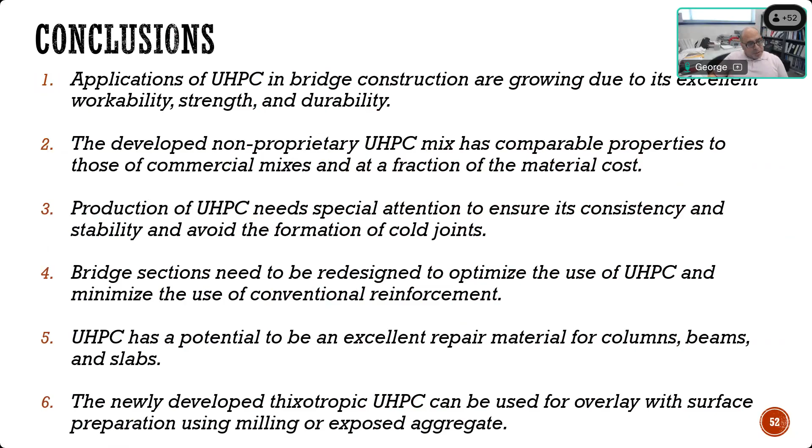Okay, so that's what I have, and I thank you for your attention. I'll be glad to discuss any of these projects or any questions you might have.

Does anybody have any comments, or even if it's just any comments? We have two in the chat. The first one is: has NDOT reached out to AGC for training and field application?

I think that's a question for the DOT, not for me. But I gave a presentation before at one of the AGC meetings a few years ago. We did a full day workshop at the university, and it was well attended, with over 40 participants—some designers, others producers and contractors. We spent half the day giving a presentation and answering questions, and the other half doing a lab demonstration showing how to mix, cast, and test UHPC. It was a good experience, and I think we would be happy to do it again if needed for training and educating contractors and their staff.